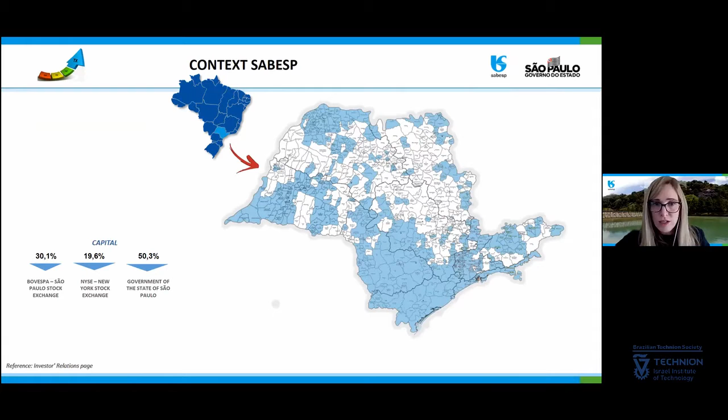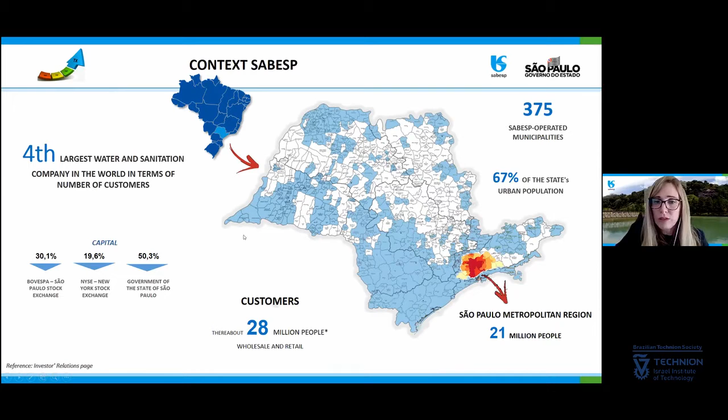SABESP is a public and private company, whose shares are on the São Paulo and New York stock exchanges, and operates in 375 municipalities, which is equivalent to 67% of the urban population of the state of São Paulo, being the fourth largest sanitation company in the world. SABESP has around 28 million customers, where 21 million are concentrated in the metropolitan region of São Paulo, as seen in this red spot here.

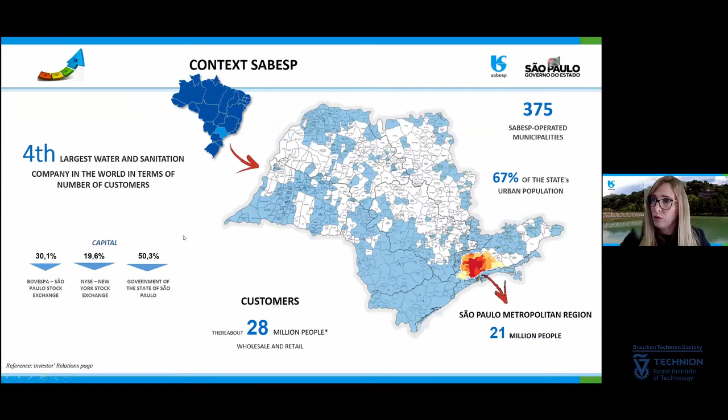Okay. On this slide, we can see the amount of investments made by SABESP in the last 22 years. It's important to note that about 30% of everything that is invested in water and sanitation in Brazil is carried out by our company.

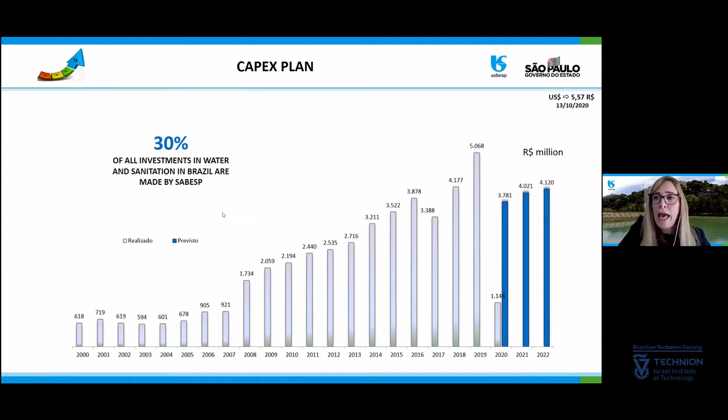Another important point is the tariff issue. We are subject to a regulated environment, so the tariff must follow well-defined criteria and is established by the regulator. We have the 6th lowest tariff in Brazil, and it is important to note that we are one of the few public sanitation companies in Brazil that bases all its investments on tariff resources without any type of government contribution.

We have very rich cities like São Paulo and like Santos, where tourism is very strong. But we also have a huge social contrast, where we have situations of extremely wealthy alongside extremely poor communities, such as Beverly Hills and Haiti side by side. Here, you see Paraisópolis slum and Morumbi district, for example.

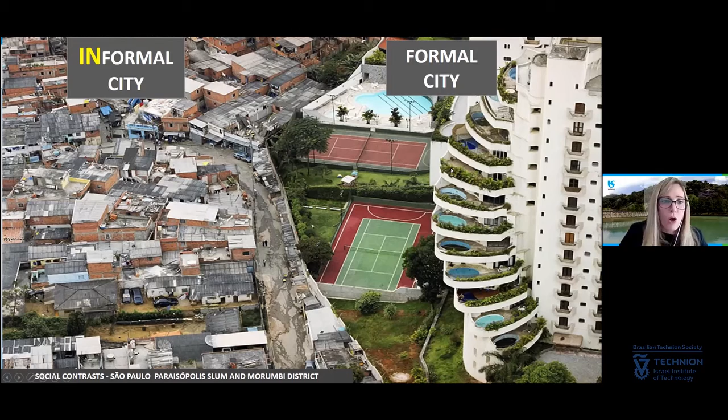So, considering these realities explained before, how can we accelerate the implementation of water and sanitation in Brazil? We need to guarantee integrated actions for short, medium, and long term. Constant actions by sanitation companies are necessary, such as constant improvement of operation and maintenance, implementation of basic infrastructure, and management of available resources.

And also actions by other players that directly impact the sanitation sector, such as integration between institutions, like municipalities, states, regulatory agencies, universities, financial agents, and others. Public policies for land use and occupation. Urban solid wastes, environmental education, reduction of social inequality. So, we apply innovation as an accelerator of these changes.

Now, I will talk a little about innovation in the company. SABESP uses the concept of open innovation and its activities cover technology readiness levels from 1 until 9. So we have projects for basic applied research, technological development, pilot tests, and validation until the dissemination of innovation. For each phase, we carry out a different type of partnership, such as universities, startups, development agencies, and others.

We have 22 different SPEs, special purpose enterprises in the different states, more than 100 municipalities, and approximately 15 million people as our equivalent population serviced by our company, and over 5,500 employees in Brazil. So we operate, you know, Brazil is a continental country, continental size. We operate from the very north of Brazil in the state of Maranhão.

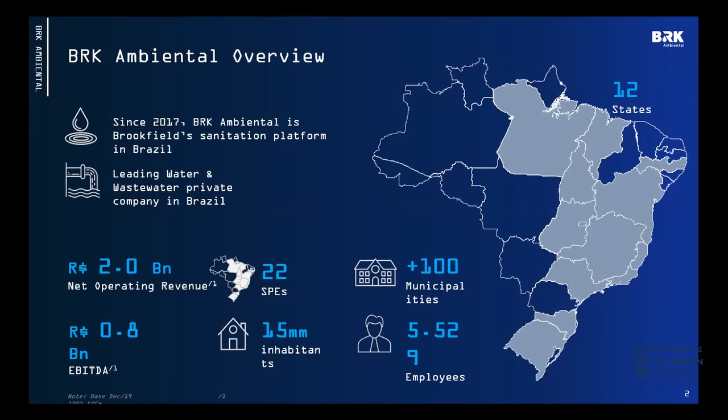...do Sul. A little bit different from the area that SABESP operates. SABESP is more concentrated in the state of São Paulo, which is the biggest state in population. We are really spread across Brazil in different states, different areas. For example, we have areas with a density of more than 500 inhabitants per square kilometer, which is a similar density to what you have in São Paulo, to areas with less than 4 inhabitants per square kilometer in the more remote areas of Brazil. So next slide, please.

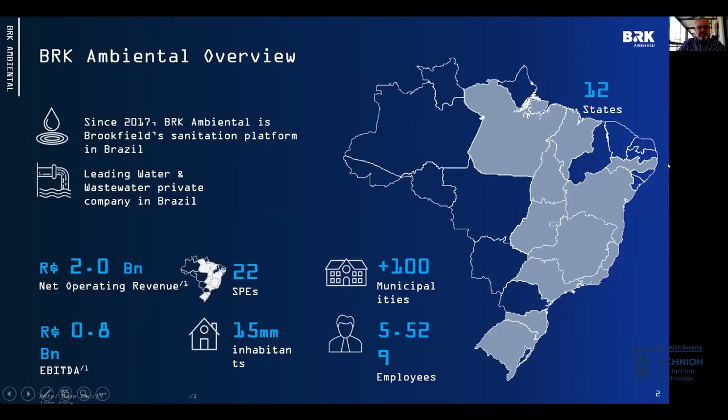And it's important to emphasize we currently have 96% water coverage in our concessions. We have 83% wastewater treatment in our concessions, with a very significant growth during our period as concessionaire. One interesting indicator is our water loss level of 39%, which compared to Brazil is a very good indicator. So we have been improving year on year on the reduction of water losses. I'll give you the next slide, please.

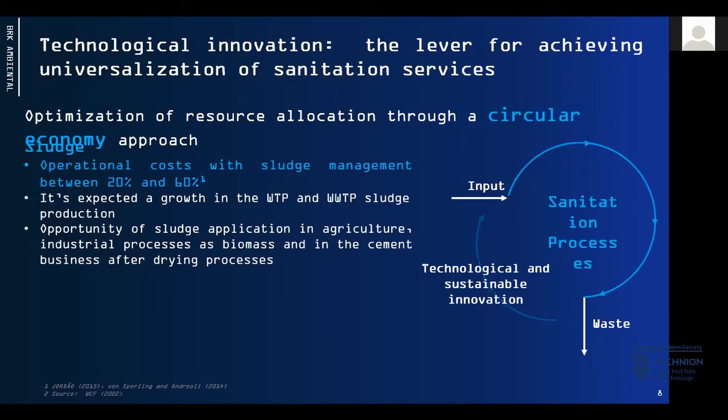So, as we saw, the current collection and treatment in Brazil is less than 50%. So we will go from 50% of 220 million people to 90%. So imagine the number of wastewater treatment plants that we need to develop, to implement. Okay, so at BRK, we started thinking about how to improve our wastewater treatment process.

So in 2012, we were, let's say, the first believers of the Nereda process. Nereda is a granular sludge biomass process with which we can obtain very high quality, almost water reuse quality, with power reduction and footprint reduction. This new technology was selected as the most innovative technology in the last decade by Global Water Intelligence. So nowadays, BRK is the largest user of Nereda around the world.

So we agree with Cristina about the barriers, but in order to overcome those challenges, we will really need to be aggressive by adopting new and proven technologies, okay? And about water losses, Brazil has around 39% of water losses. It's the same case at BRK. We have a big challenge to reduce that. We estimate that as we reduce to 20%, we have a net gain of almost 31 billion reais in terms of revenues for the water company.

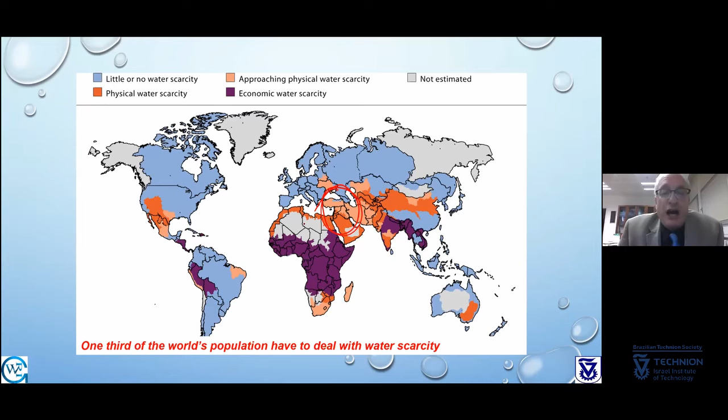Now, one third of the world population has to deal with water scarcity. We know that in this part of the world, and of course in many others which are arid lands. To give an example, Israel uses about 1.6 billion cubic meters of water per year, mostly agriculture, and then we have municipal water and industrial water.

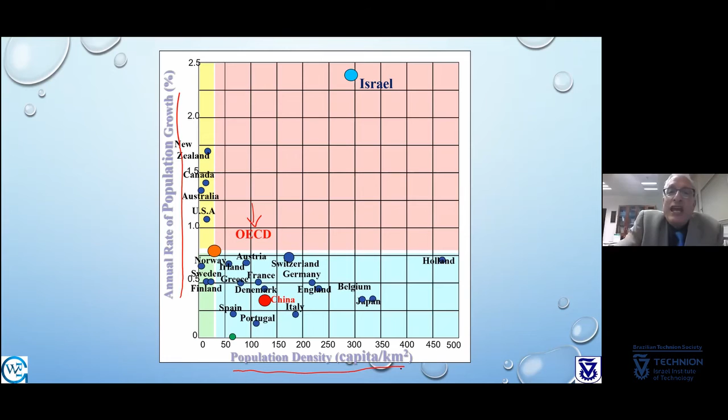95% of the wastewater in Israel is recycled and reused for agricultural uses. So this is very important for us. When we look based on the OECD, and we check the annual rate of population growth with the population density, we are here, very high.

And the meaning of this is that we need to provide clean water to a very fast-growing community with an agricultural-based economy. That is Israel. Of course, we also have a technology-based economy, but with fast-growing standards of living in arid regions. So how this is done, I will show you a little bit, and then I will tell you a little bit more what we do and how we do it.

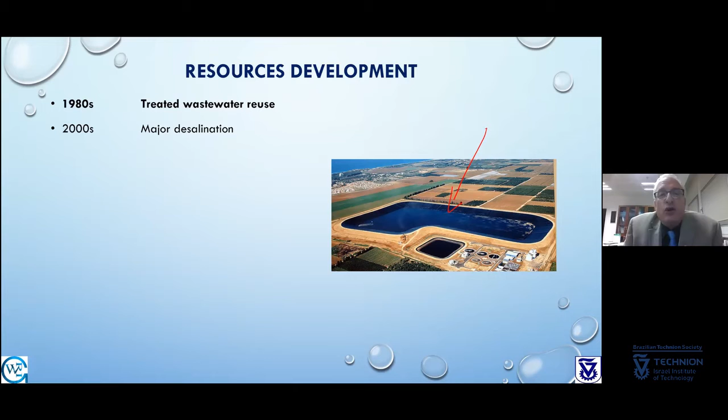One of the most important issues in the government in Israel is to treat wastewater and reuse it. So that's the reason we have these plants for treated wastewater reuse. And the second is that since we are in arid areas, we cannot depend on rain. So we need to do what is called desalination, take water from the sea and use it. And this is what we do today, using membrane technology. A membrane is a plastic or a polymer that allows, with pressure, to get clean water from salt water.

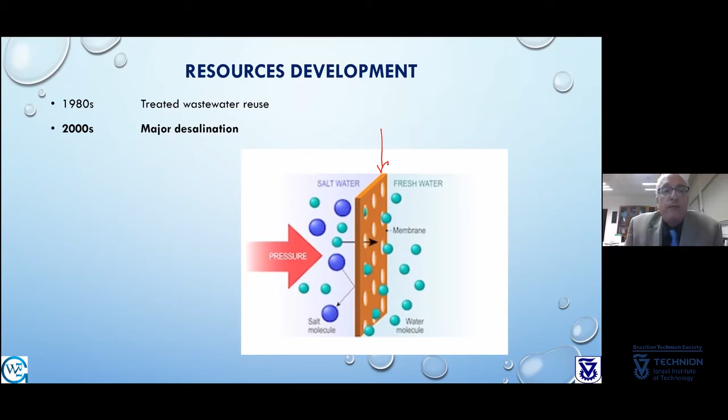So how do we do that? We need to save water. And that's the reason in Israel we need to be smart in irrigation, to know how much irrigation you could give and where. That's the reason we also have sensor-based irrigation, where you could sense the plant itself. And as you sense the plant, you know how much water is needed. You also sense whether you are losing water or not in some places of the city, or, like Cristina was saying, illegal use if somebody takes water.

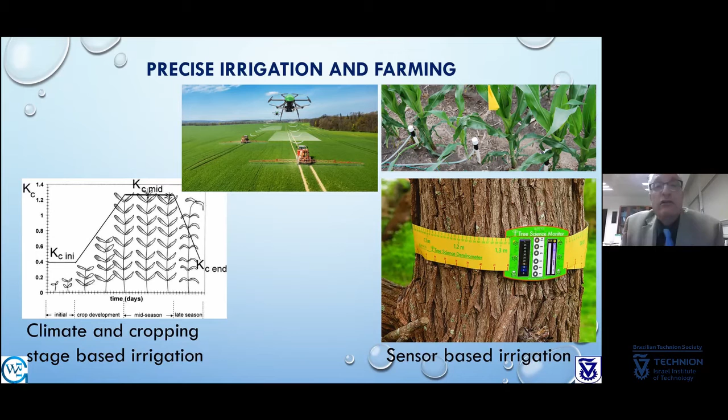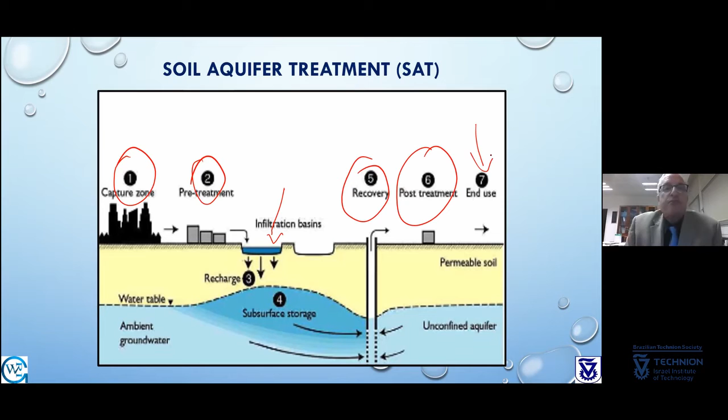But at the same time, since we don't have much rain, we now have desalination. For municipal water, we have 100% water from the 5 desalination plants. So this is the amount of water that we use in housing, and mostly also in small companies, but not in agriculture. And the 95% we recycle, we have for agriculture.

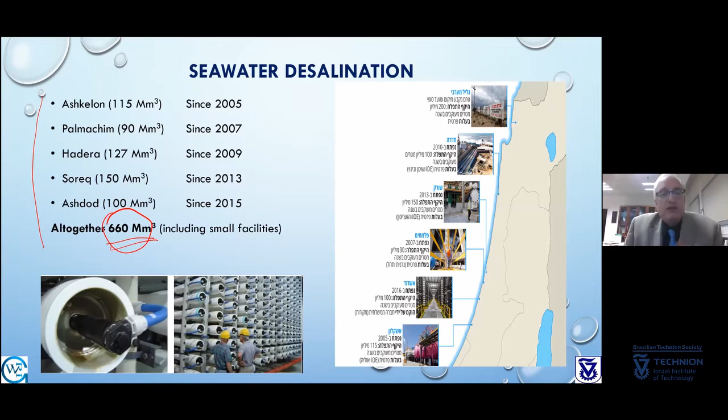So one of the keys to success of water today from the government is that we know how to deal with fresh water. Now, when we have marginal water, we know how to treat the wastewater and saline water. In technology, we are good at inventing new technology. This is very, very important for us. And having the desalination, we know how to save water. And what is very important in Israel is that all the water is mostly centrally managed. So everything goes to one big decision.

But let me tell you the true story. When you look at water, you will see that 95% of the water of the world is from oceans. And how much fresh water do we have? It's about 2%. But if you look at this 2%, 68% is glacial water, and 30% is fresh groundwater. So how much water do we have? We have 0.1%. This is the water that we use normally.

So we know, and this is a fact, that by the year 2030 the world will have only 60% of the water it needs, if the trends continue. And we know that one in every 5 deaths of children under age 5 worldwide is due to a water-related disease. So this issue of sanitation and recycling water is extremely important, not just for Brazil, not just for Israel, but worldwide. And we need to think how we do it smart.

Now, I will not go into the scientific part, but I will tell you a little bit how we do it. I am a chemist and I like to make polymers, plastic materials, and we prepare membranes. I wanted to show you some of the things that membranes can offer the world. Imagine the system here. This is the membrane. And then you have many particles around here that you eventually want to filter. And you will see that very fast you will clog the membrane.

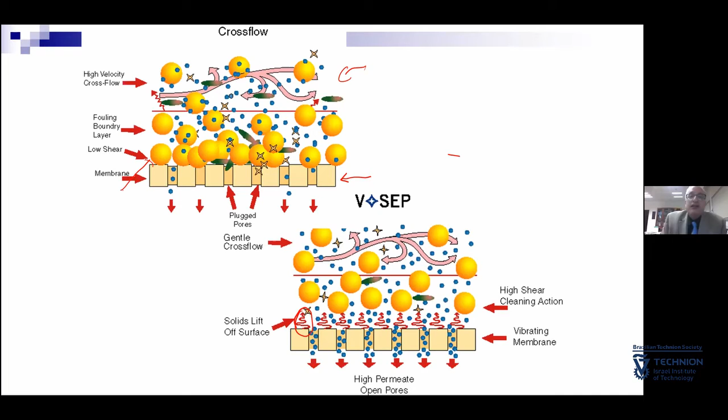Now let's imagine what happens if you build on the membrane these small springs, which are other molecules, that will not allow these big particles to get close to the holes, and you will continue using the membrane for filtering, but only the good water, because we are able to tailor the size of this hole. So it looks like a dream, but this is it.

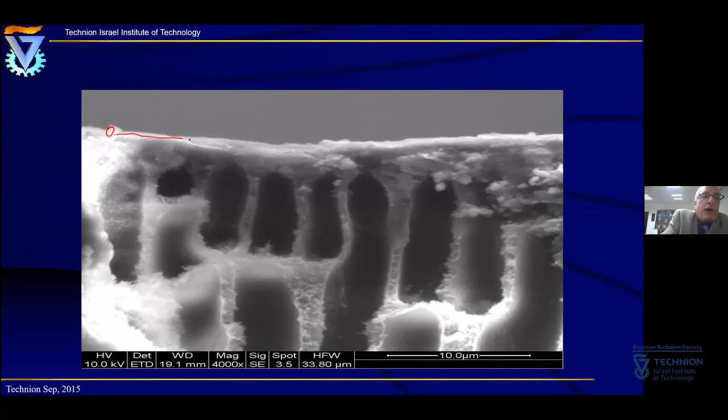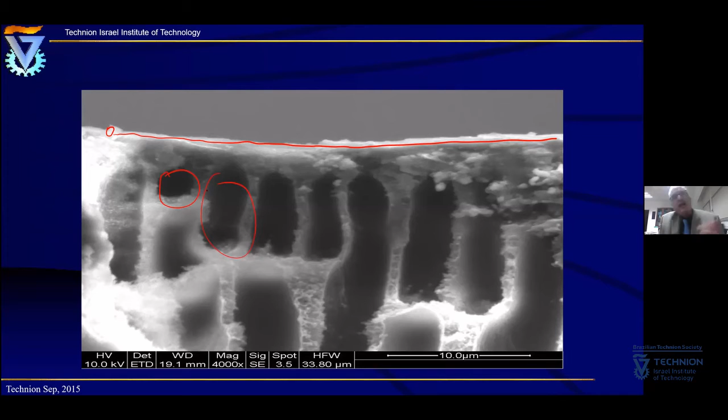And the membrane here is this part, this small part in the top. That is the membrane with the spring. All this, what you see here, is to give it mechanical strength. But I know you don't believe me, so I wanted to compare.

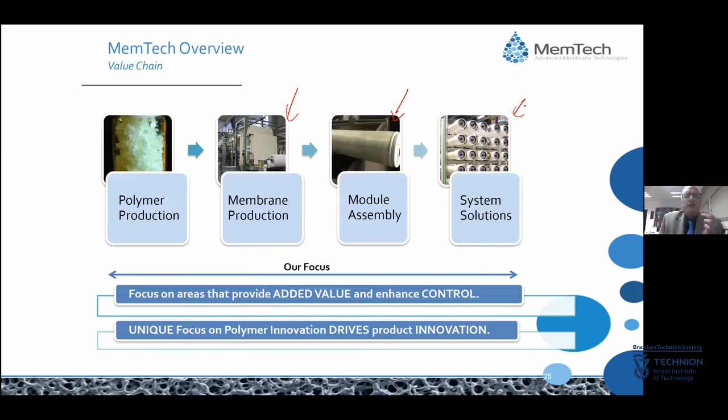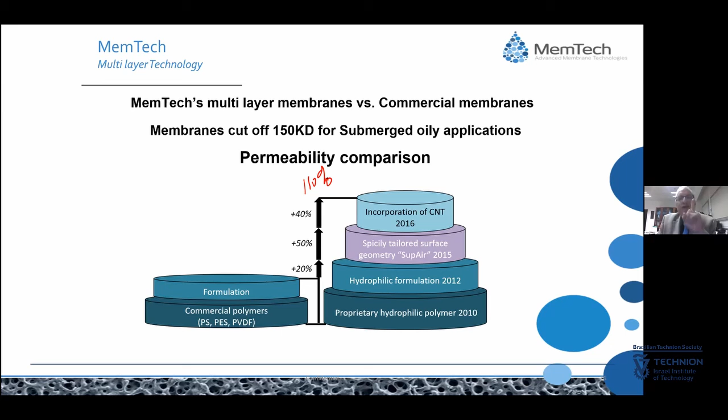So first we were very happy, and then we started a company. So now we produce the polymer, and we have the membranes, and now we could have new modules. And this is the system that we could show for innovation. Since the start, we continued, and now we are 110% better than the beginning. But that's not what I wanted to show you. I wanted to show you one application, and I could show you at least 5 or 6 applications that we know could be interesting.

We know that in some places you have a mixture of water with oil. And you want to use the water, not the oil, and the oil is a pollutant. How do you clean it? You see that, for example, in milk dairy products, with the cow, you have the oils, and also whatever is coming out. And then you have fruit, the apples. Every apple is covered with an oily material to make it very bright. And many other applications in which you have water and oil.

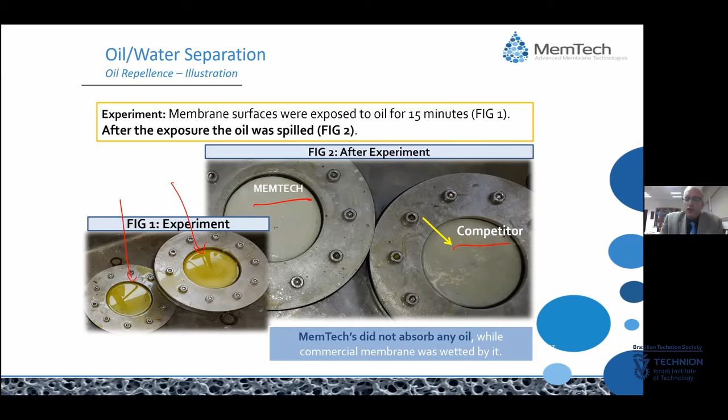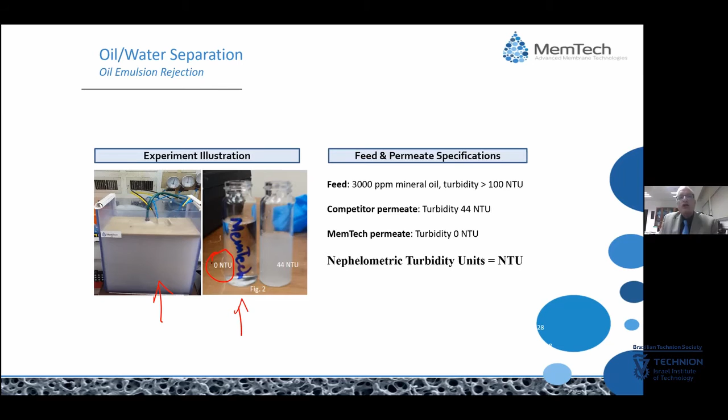So we thought in the beginning, can we really clean the water from the oil? This is just one way: you could put oil with pressure or without pressure, and then after time, you could see we take water with oil and we get 100%, 0 NTU, meaning no oil, clean water. It could be with salts, with big compounds, small compounds, you get clean water. This is incredible because it's a very nice way to recycle your water, in places where you are not able to bring clean water, so people could reuse it normally.

We are all suffering from this coronavirus. We know that we have to test many, many cases to check every person to see who is sick, and then put him in quarantine. But there is another, faster way to do that, and we are already doing it. We found a way at the Technion in which we could check the wastewater from different streets in the cities. You start from the big city, then go to the wastewater from different streets, and then to the building. And you will find with the same very fast sensor who is sick. Then you could just check the building. So you don't have to wait for people to come. You will find it based on the wastewater.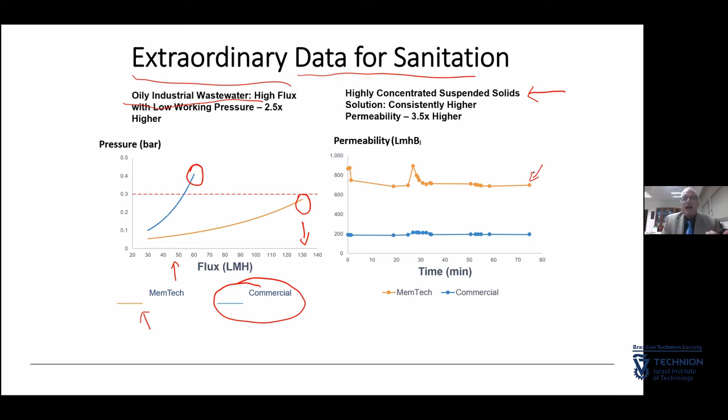So this is the way we're trying to do. But how we do it is also very important, because we want to offer the world a better life, especially, at least for me, what is water related. However, we have the knowledge, but I want to offer you, I need you as partners.

So I think that we can do a lot of things together between Brazil and the Water Research Institute, because we could sit together, have a breakthrough, what we can offer, what do you need, how we could share, developing the basics here, and then the continuation in Brazil, because this is important, because what Cristina says in the beginning, they cannot wait for buying everything abroad. But this will be a very good way to start and to be thinking out of the box.